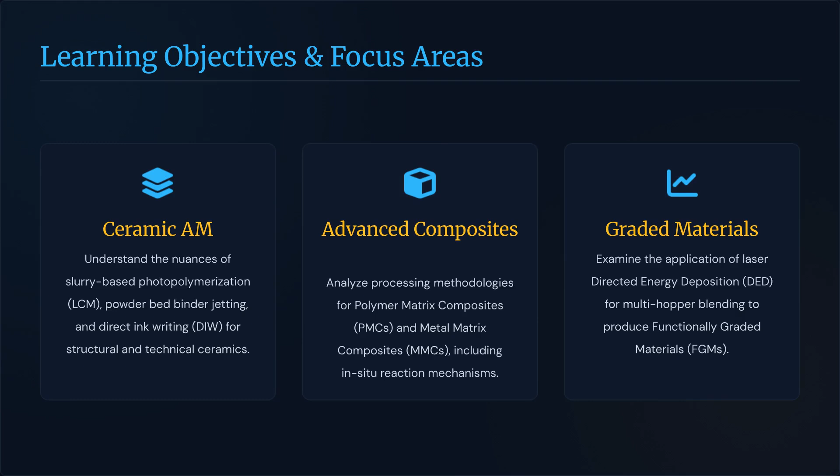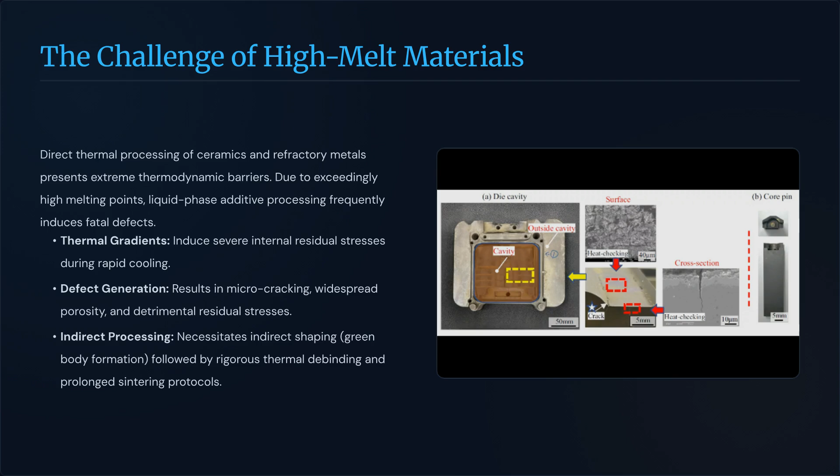In this video, we will cover learning objectives including ceramic additive manufacturing, advanced composites, and functionally graded materials. We will examine processing methodologies for various materials and applications. Direct thermal processing of high-melt materials like ceramics presents significant challenges. High melting points often lead to thermal gradients, defect generation such as microcracking, and the need for complex indirect processing methods.

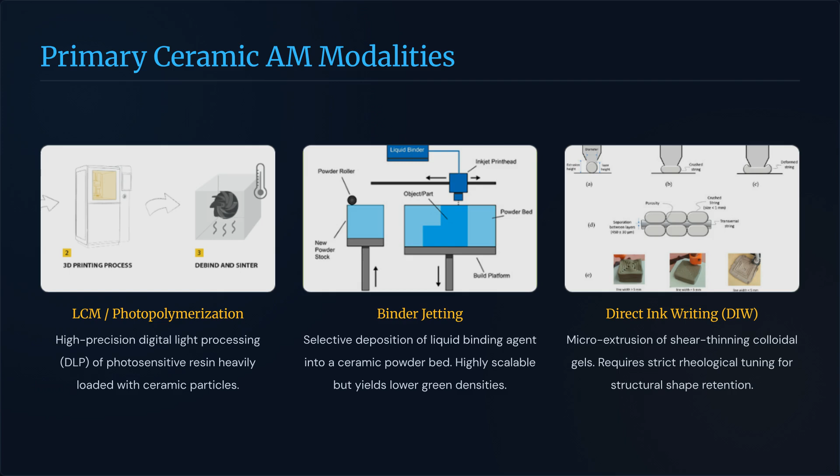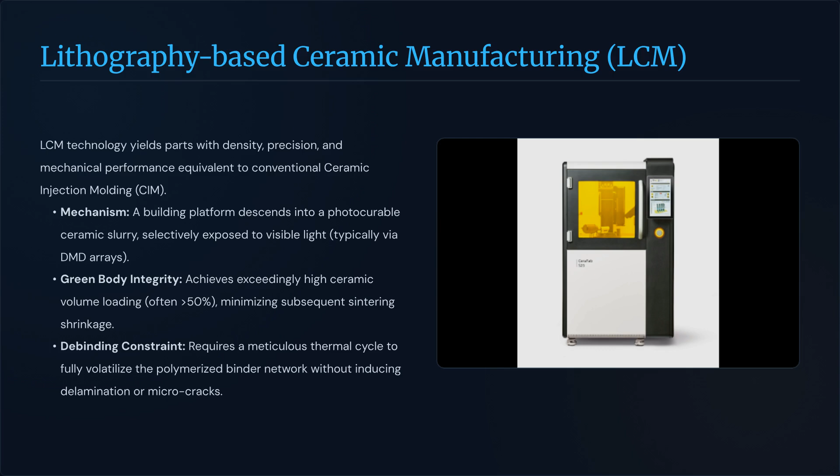We look at primary ceramic additive manufacturing modalities: lithography-based ceramic manufacturing, binder jetting, and direct ink writing. Each method offers unique advantages for structural and technical ceramics. Lithography-based ceramic manufacturing, or LCM, provides high density and precision. This process involves a building platform, photocurable slurry, and light exposure, followed by critical debinding stages to ensure structural integrity.

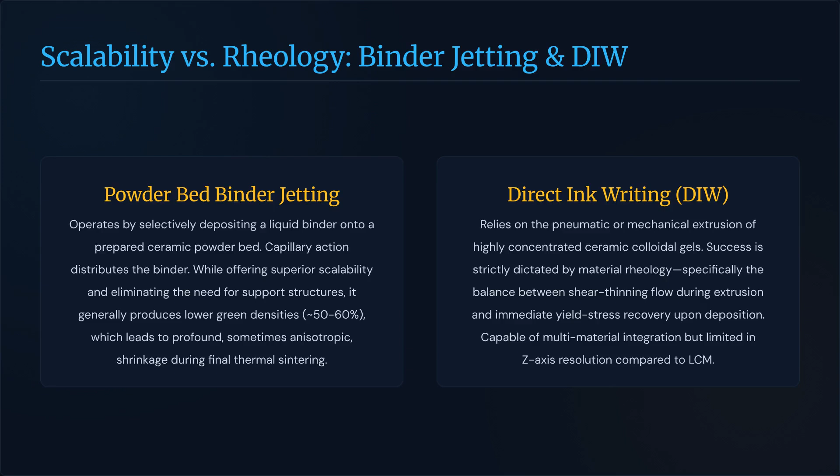Comparing binder jetting and direct ink writing: binder jetting offers superior scalability, but can lead to lower green densities. Direct ink writing relies heavily on material rheology for success during extrusion. Technical ceramics like alumina and zirconia are vital for their hardness and toughness. Understanding their volumetric shrinkage during sintering is essential for manufacturing precise structural components.

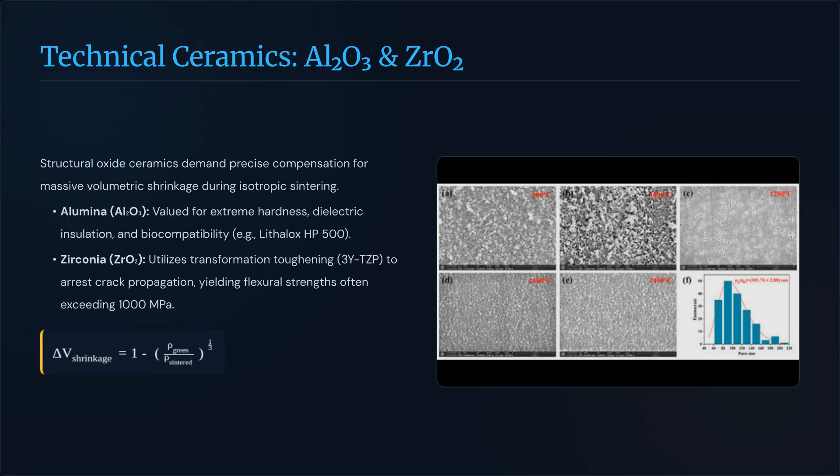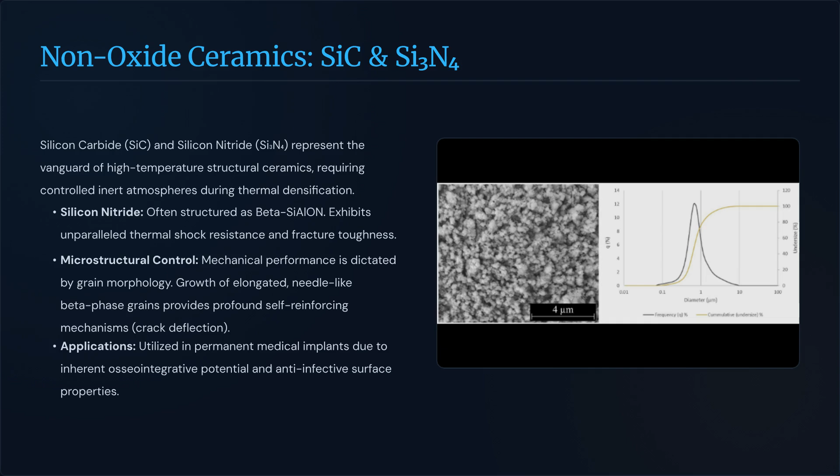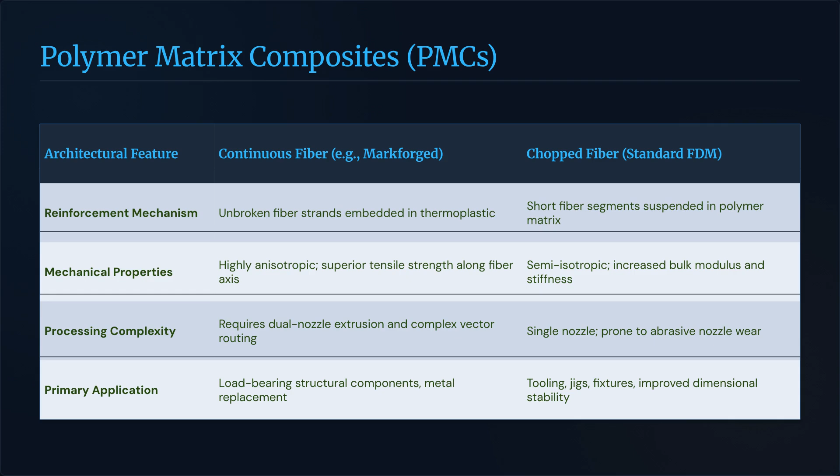Silicon carbide and silicon nitride are at the forefront of high-temperature ceramics. Their mechanical performance depends on microstructural control and specific grain growth, making them suitable for demanding applications like medical implants. Polymer matrix composites vary by their architectural features. Continuous fiber methods offer high tensile strength, while chopped fiber methods, common in standard FDM, improve bulk stiffness and dimensional stability.

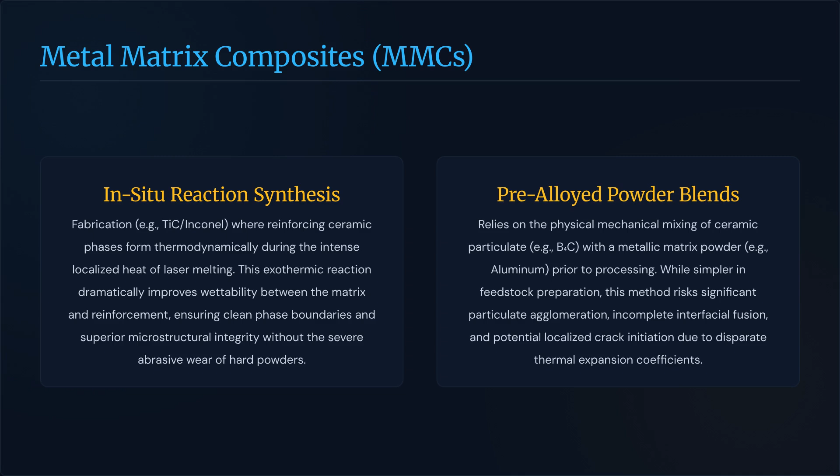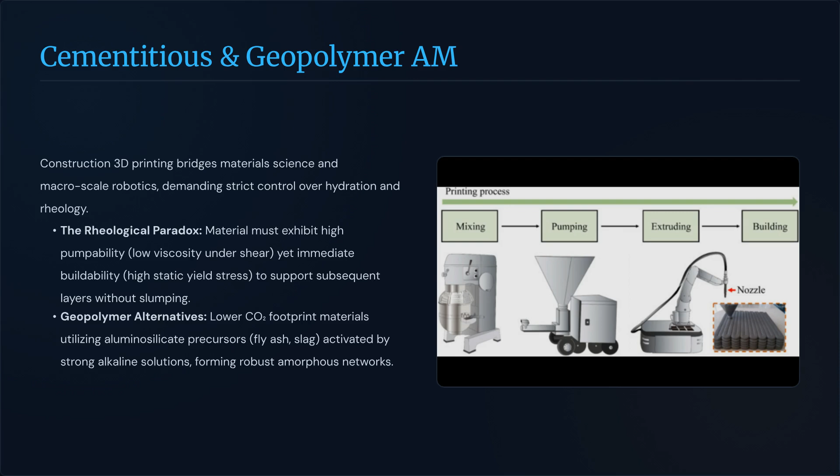Metal matrix composites can be fabricated via in-situ reaction synthesis or pre-alloyed powder blends. In-situ reactions often provide superior phase boundaries, while physical mixing simplifies feedstock preparation but risks material inconsistency. Cementitious and geopolymer additive manufacturing requires careful control of rheology. Balancing high pumpability with immediate buildability is the main challenge, with geopolymers serving as an eco-friendly alternative.

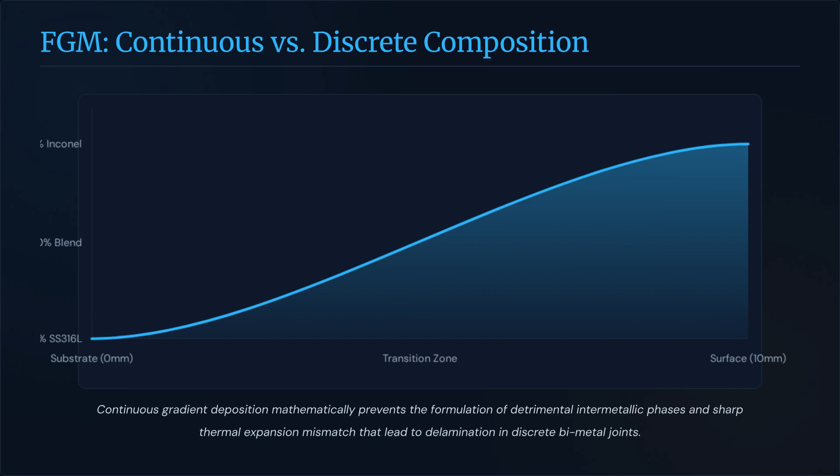Functionally graded materials enable compositional control by creating spatial transitions within a single component. Laser-directed energy deposition is key to this, effectively mitigating thermal stress between different materials. Continuous gradient deposition is superior to discrete joints. It helps prevent intermetallic phase formation and manages thermal expansion mismatches, which are common causes of delamination in layered structures.

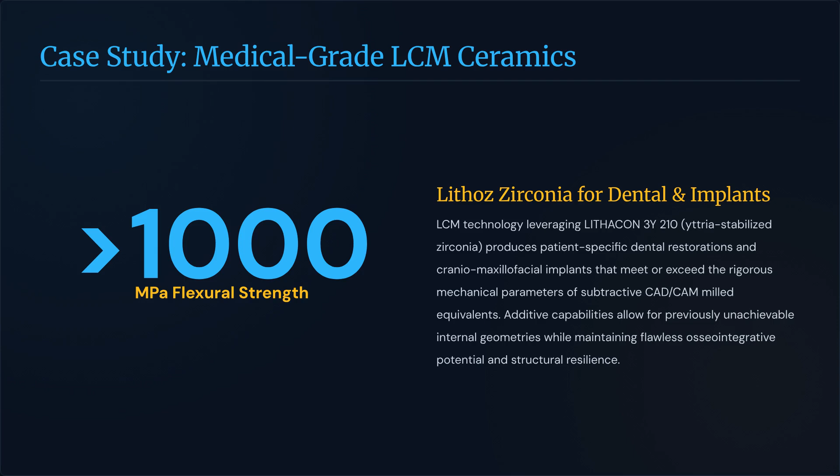A notable case study is the use of Lithoz zirconia in medical applications. LCM technology allows for patient-specific dental and cranio-maxillofacial implants with high flexural strength and complex geometries.

Thank you for joining this session on the frontiers of additive manufacturing. We hope this overview of ceramic and composite processing challenges has been informative.